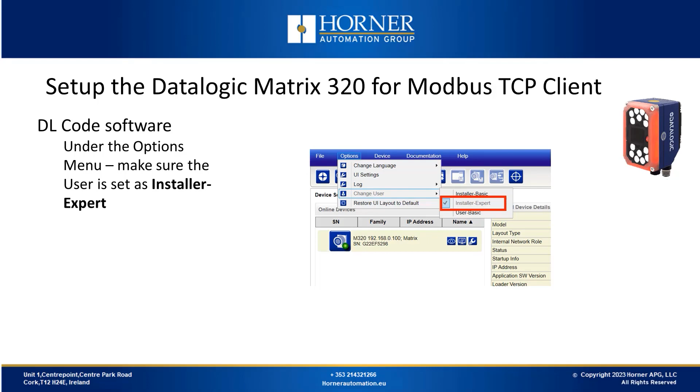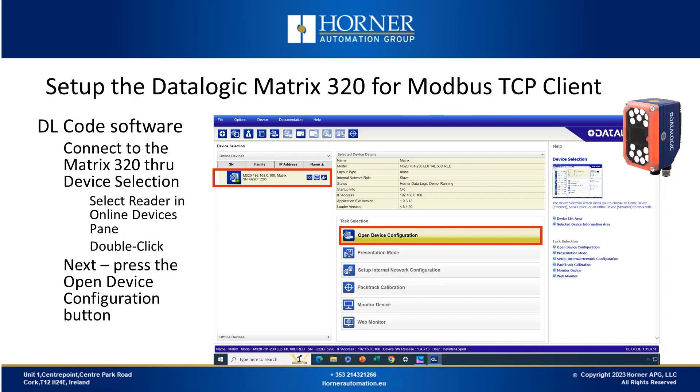Next, we need to establish effective communication with the 320 over Ethernet, which is the most recommended approach. In the software, you will find it listed in the left-hand pane. Simply double-click on your scanner to select it and then click on Open Device Configuration to enter the configuration mode. Once in configuration mode, you will see a menu at the top displaying options numbered 1, 2 and 3 from left to right. Then we select the reading phase option.

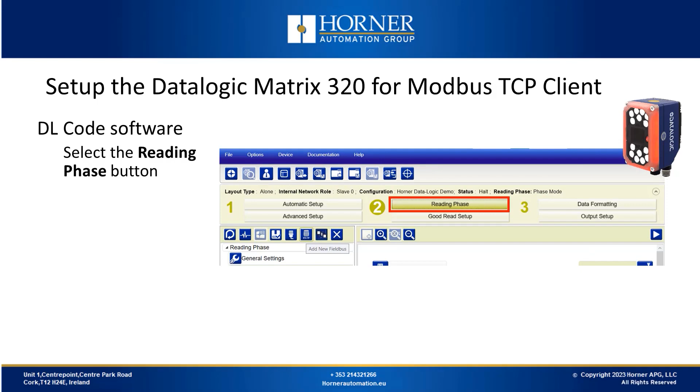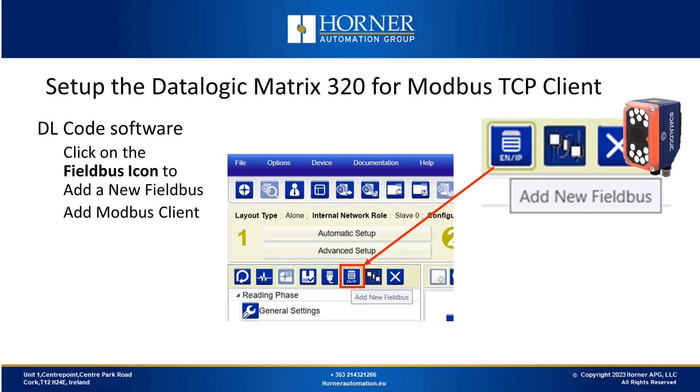Once you are in expert mode, click on the field bus icon present to add a new field bus. When you press that button, select the option to add a Modbus client, as that is the specific field bus we will be working with today. Once you've added Modbus client as a field bus, click on the Modbus client, and on the far right hand side you will see all the Modbus parameters that need to be configured for Modbus TCP to work.

We'll begin with the key parameters that require changes, starting with the start register. By default, the barcode scanner writes the barcode data to Modbus holding registers 40001 and onward. If you set the start register to 0, it represents an offset of 0, meaning the barcode data will be written directly into Modbus holding register 40001.

However, using this default offset of 0 may lead to conflicts with other data, such as analog output or high-speed counter data. In our demonstration, we use a start register of 99, which gives an offset of 99. This means the barcode data will appear starting at %AQ1, avoiding any potential conflicts. The number of registers corresponds to the number of integer or character data you wish to receive. In our example, we set it to 30 registers, equivalent to 60 bytes or 60 characters of information.

Next, we need to configure the remote address of the Modbus TCP server, which in this case is the OCS. We set it to the address of the OCS. Also, we need to configure a connection retry time in milliseconds. We set this to 3 seconds, which worked well. You can likely set it even shorter if desired. These are the basic Modbus TCP parameters for the 320.

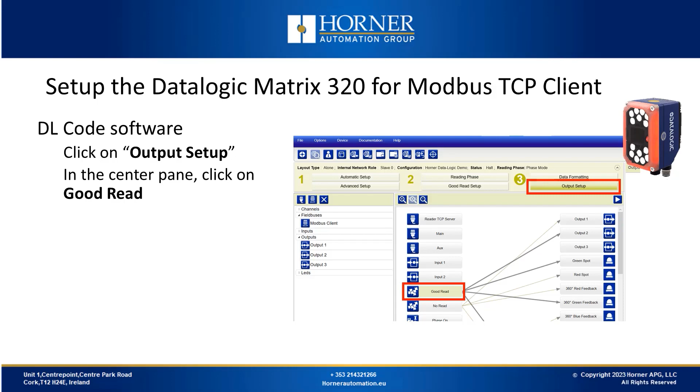There's still some remaining work to be done. We've configured the input side, which activates the scanner's read phase. Now we need to configure the output bits that the scanner writes to the OCS to indicate status. The two basic ones are good read and no read. We'll begin with good read. In the center pane, click on the Output Setup tab at the top and then select the Good Read button. We can map that to a specific Modbus bit, which will be an output bit.

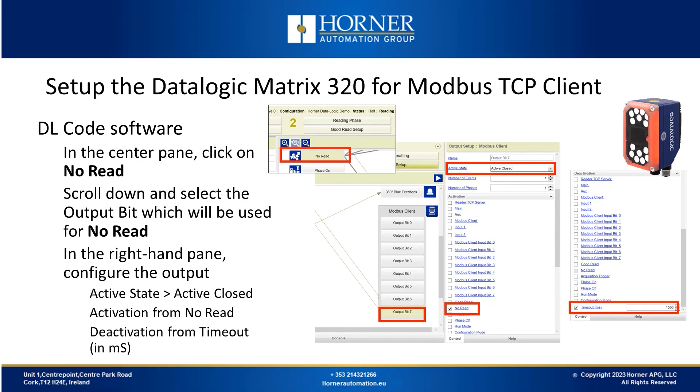These output bits will be mapped to %Q1 to 8, so 0 to 7 on the screen corresponds to Q1 to Q8. In this example, we chose the 7th bit to indicate a good read. It turns on whenever a good read happens and is written or activated. Additionally, we configured it to automatically turn off after a timeout of 1 second. And then similarly for no read, we also need to configure a different output, again correlating somewhere between Q1 and Q8. And we'll configure it to turn off after a second also.

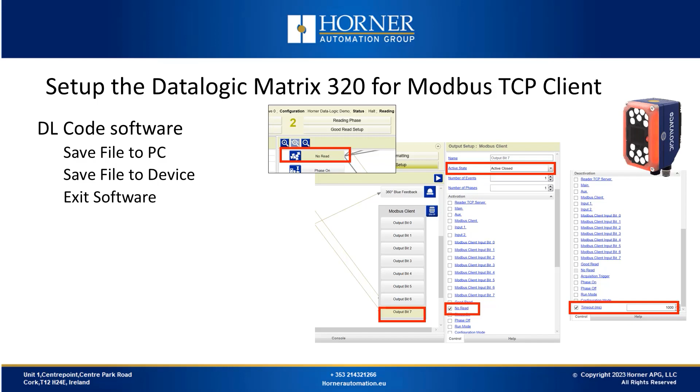When we're done with that step, the last step is configuring the output and configuring the reader. At that point, we can save our file to the device and we can exit the software and things will start running. The Horner OCS is acting as the server, so there's a lot less to configure. You basically go into the hardware configuration, you click on the Ethernet port that is going to be acting as the Modbus TCP server. Once you've selected the Ethernet port, you need to make sure that your Ethernet addresses are set up like they normally would be. IP address, net mask, etc.

Once you've done that, all you have to do is check the checkbox for Modbus server and you're done in 99.9% of the cases. There are some additional parameters you could change if you wanted to, but they're going to be used very rarely. So at runtime, the OCS is going to turn on the digital input bit that is being read by the 320. That's going to tell the 320 to go into read phase.

Once that happens, the 320 is going to read the barcode, write the barcode data to the AQ registers that are again mapped over Modbus. And once that's done, it's going to send a good read signal and write that to the %Q that's mapped over Modbus as well. And then after a second, the good read bit's going to turn off.

Now we'll examine data handling in the OCS. The barcode data, represented as byte data, is written over Modbus, which uses integer type data. Each integer occupies 2 bytes according to the Modbus specification. The OCS stores this data as integers. In register-based advanced ladder programming, you don't need to worry about the byte order, as the OCS automatically handles it when using the ASCII function on integer data. However, if you're using a variable-based language like variable-based advanced ladder or IEC, you'll need to unpack the integer data into a byte array and ensure correct byte handling.

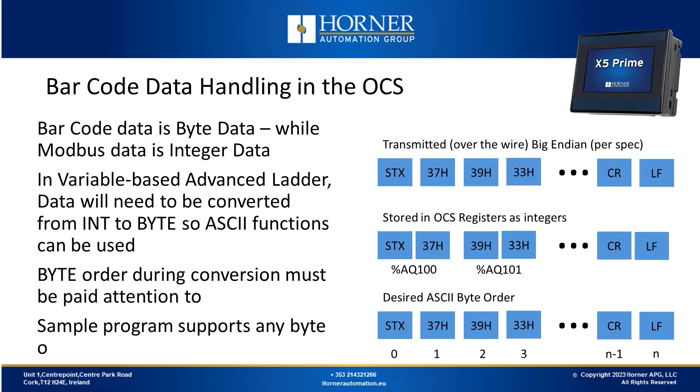We have a ready-to-use example program available for download that handles this process. Whether you're using a barcode scanner like the Datalogic, which writes data in the correct order, or another device that requires byte swapping, you'll have the necessary tools to arrange the bytes correctly.

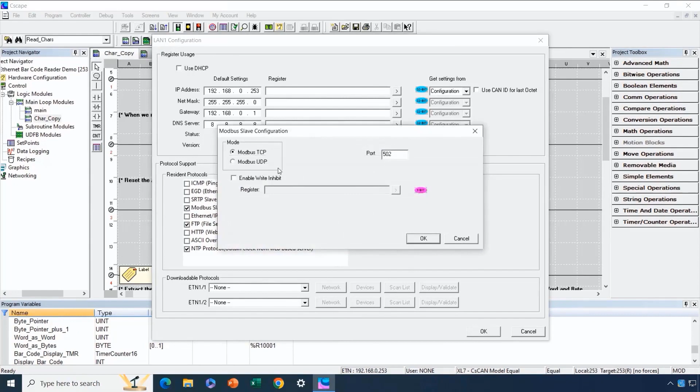Now we'll have our demonstration using the Datalogic Matrix 320 Ethernet barcode reader. We'll start in Cscape, then move to the bench, and then return to Cscape. The setup process has been straightforward. From Cscape, we'll quickly configure the Modbus settings. In the I/O configuration, select the LAN port for Modbus TCP server and ensure the IP addresses are correctly set up and that Modbus slave is configured. So on the OCS side, that's all that needs to be set up.

We've also performed some mapping using variable-based advanced ladder programming, so we'll look at that now. The barcode data is written starting at AQ100 with a capacity of 30 words or 60 characters. So AQ100 to 129 is where the barcode data is coming in. We've mapped this data to a variable called barcode integer.

The good read signal is written by the 320 to Q7 through its Modbus map, while the bad read is received via Q8, and both are mapped to internal variables. This covers the basic OCS configuration. We'll explore unpacking the integer data into byte data shortly.

Now we'll look at the bench. Here we have the Datalogic Matrix 320. It features a convenient built-in express user interface consisting of a single button and a series of LEDs. This interface allows for quick aiming and focusing without the need to bring your computer to the production floor.

Mechanically, the device is robust, with mounting holes at the back for easy bracket installation. It offers various connectors, including a multi-connector for I/O and serial port connections, as well as an industrial Ethernet connector. In our setup, both the 320 and the XL7 are connected to an Ethernet switch.

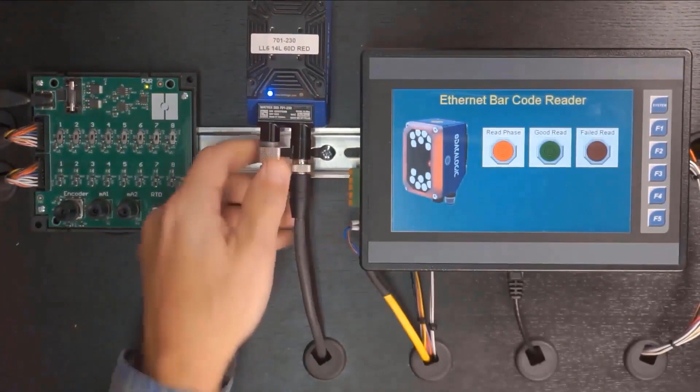For demonstration purposes, the read phase bit mapped to I1 is controlled by a switch on the I/O simulator. When the switch is flipped, I1 is activated, initiating the read phase. Indicators for successful and failed reads are provided by the barcode reader itself. The read data will be displayed on the screen.

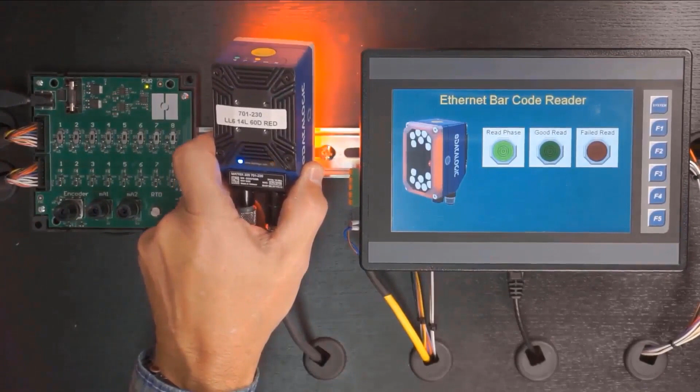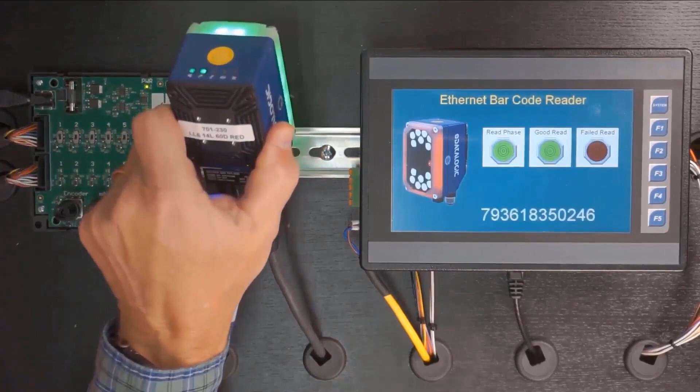Now we'll perform a quick read. We activate the read mode and aim the device towards the barcode. The indicator turns green upon successful scanning and the number is displayed temporarily. Repeat the process for another read by cycling the read phase button or input. If a barcode cannot be read during the read phase, a failed read indication will be shown. This covers the runtime operation, which is quite straightforward.

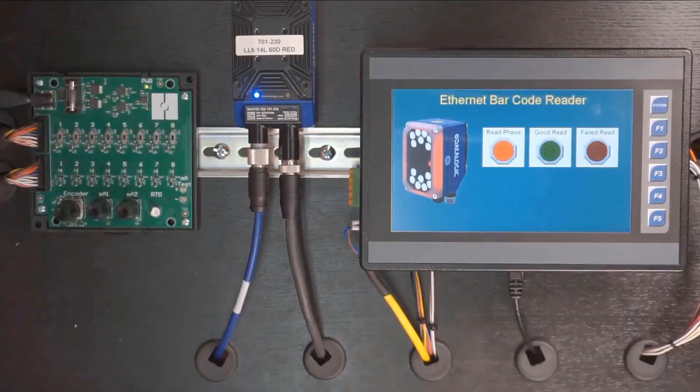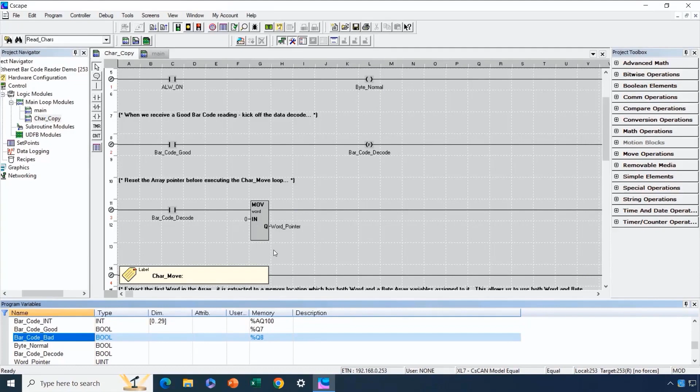Now we'll return to Cscape and discuss unpacking the integer data as bytes. If you're using register-based advanced ladder programming, there's no additional action required. The barcode data written as integers by the Datalogic Matrix 320 is already in the correct byte order, and the ASCII functions will handle the unpacking properly. However, if you prefer utilizing the advanced features of variable-based advanced ladder programming, there's some extra work involved to reap the benefits. So we'll firstly look at byte order.

Now, if you're using most Modbus barcode scanners, the integer data is going to be written in the proper byte order. But even if it's not, you can change this contact in the sample program to always off, and it'll handle reversing the bytes. But if you're using a Datalogic, you can just leave this as an always on because it writes the data in the normal fashion.

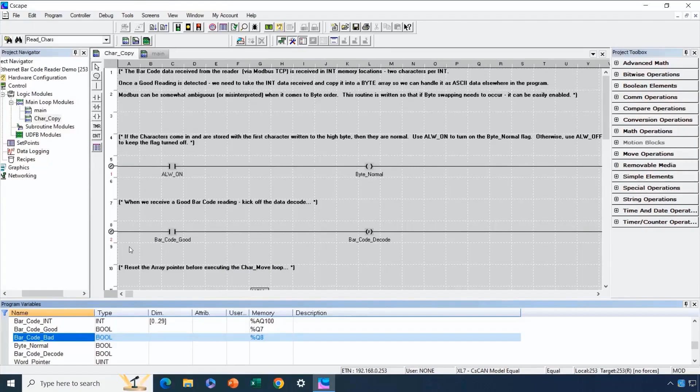So every time we get a good reading, we'll turn on a one shot, and then we're going to go through a loop, and we'll unpack the integer data that was written by the barcode reader, and we'll copy it into a byte array. In the variable list, barcode integer represents the incoming data, while barcode byte is where the unpacked data is stored. To handle the mixture of word and byte functions, a trick is used, involving a word variable mapped to a specific memory location and a 2-byte byte variable mapped to the same location. This allows for individual byte manipulation while representing the same data in words and bytes.

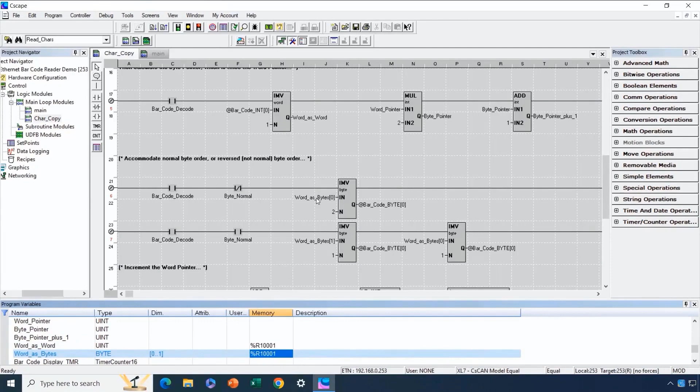After unpacking the bytes and placing the information in the byte array, the logic handles displaying the barcode read results on the screen and removing it after 5 seconds. Unpacking the bytes requires some extra effort, but remember that if you're using register-based advanced ladder, this step isn't necessary.

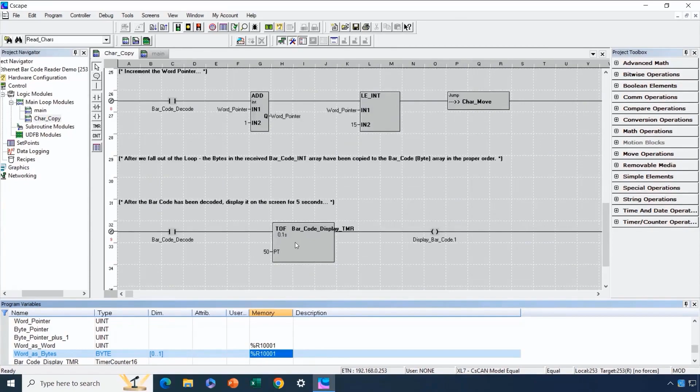So what are the advantages of Ethernet barcode readers? Adding multiple readers is much easier with increased bandwidth as it handles them without issues. Configuration and runtime offer additional tools such as live and stored image viewing thanks to Ethernet accessibility. The OCS primarily deals with barcode information while the data is available for external access via a web browser on the network. Specifically, we discussed the Datalogic Matrix 220, which offers flexible Ethernet options including Modbus TCP, Ethernet IP, and various other protocols.